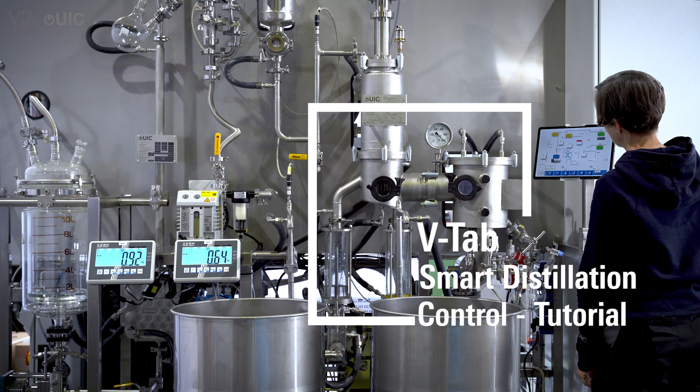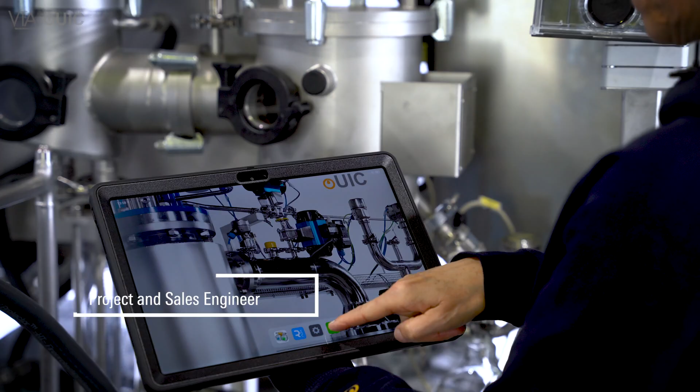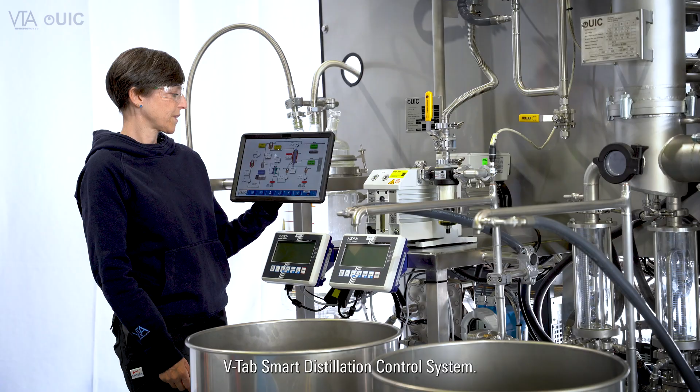Let me show you how easy it is to control our distillation system. All parameters which need to be controlled, set or defined can be managed with our V-Tab Smart Distillation Control System. First of all, we have a picture of the whole setting where you can see the main components like the feed vessel, the degassing stage, our distiller, and on the second page you see the vacuum system.

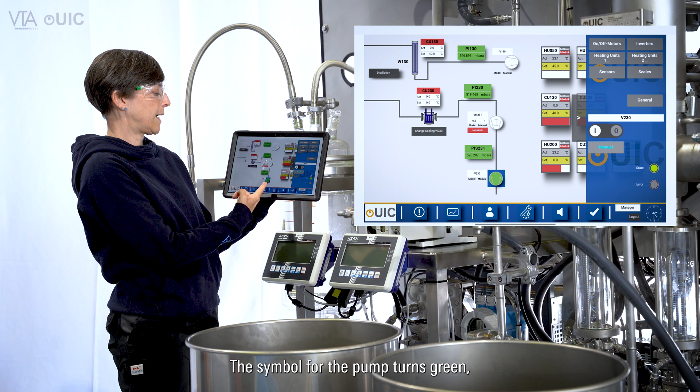We turn on, as a first thing, the vacuum system to generate the vacuum in the system. The first pump we switch on is the rotary vane pump. I just tap on the pump, the settings for the pump are displayed here on the right side, and I just say on. That's it. The symbol for the pump turns green so that I have an indication that the pump is running.

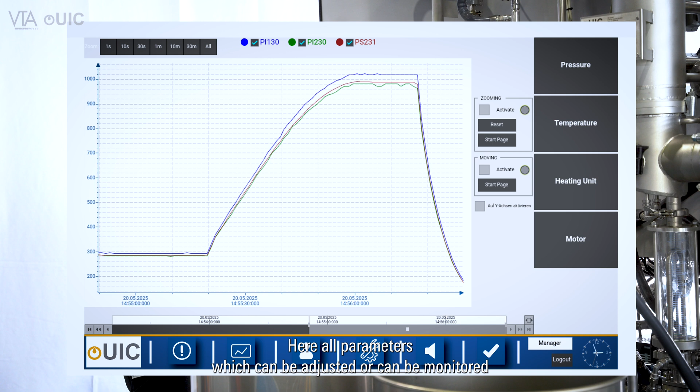Then I can switch to another section, our easy to read diagram. Here all parameters which can be adjusted or monitored, like pressure, temperature, the temperature of the heating units and the motor speed are displayed, and you can see here that the pressure is going down.

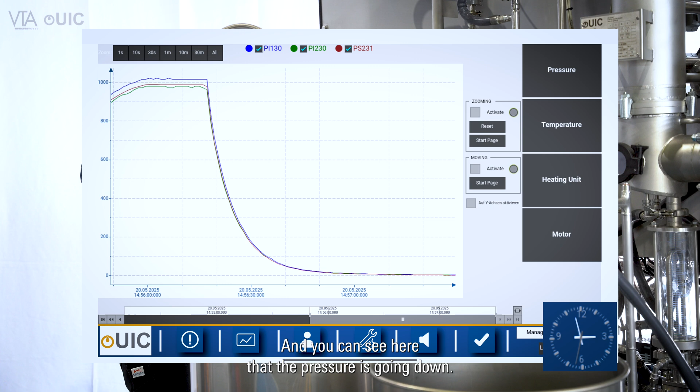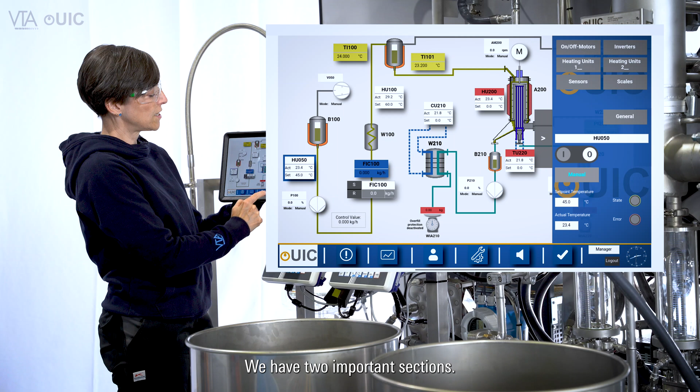Now I turn on the heating system for the feed vessel. So I simply click on the corresponding symbol. The setting window is shown on the right side. We have two important sections. One section is the set point section and the other one is the actual section. So I can type in the required temperature I would like to have for the feed vessel and turn the system on.

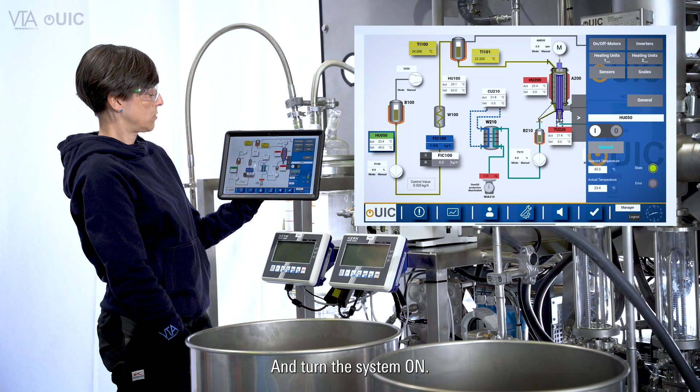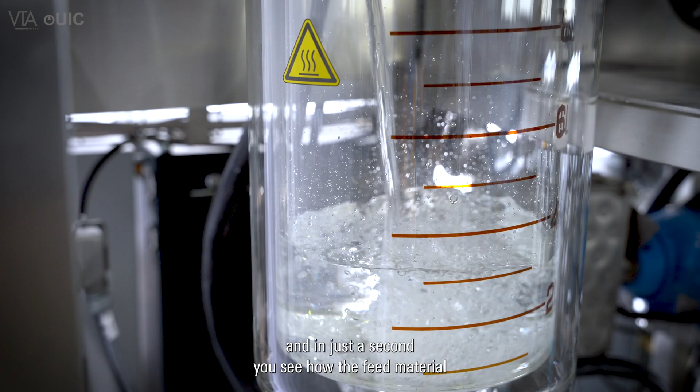Now I turn on the vacuum pump to evacuate the feed container, and in just a second you see how the feed material from the bucket is fed into the feed container. Of course, I can adjust the speed of the pump, which is according to the amount of feed which is fed into the system.

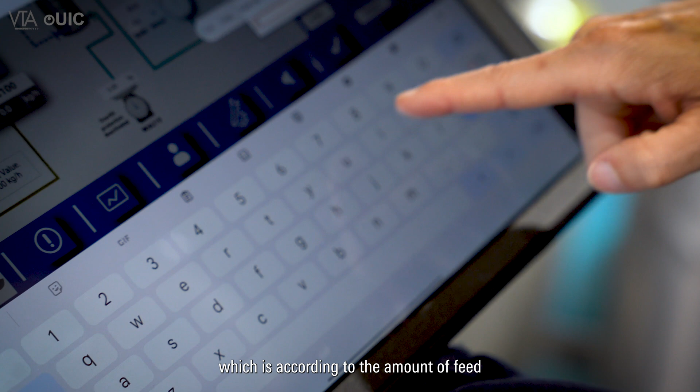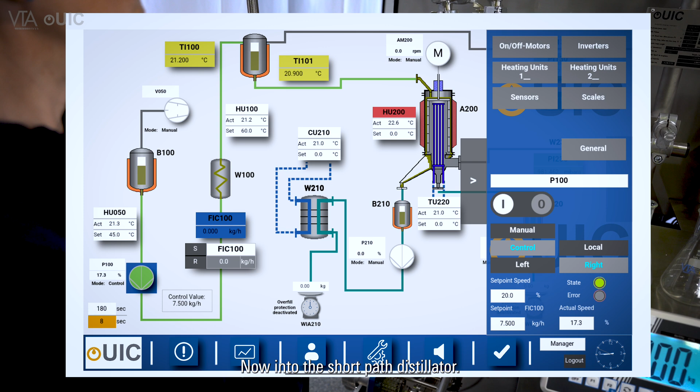We start the process by turning on the feed pump, just clicking on it and say OK. Now the feed pump is running, which is visible on the green symbol, and the feed is entering the short path distillator. To start the wiper basket of the distillator, I click on the motor symbol and turn on the motor of the wiper basket. And if needed, I can increase the speed of the wiper basket.

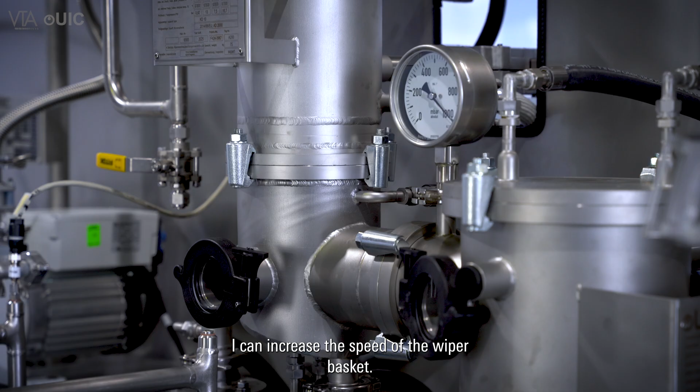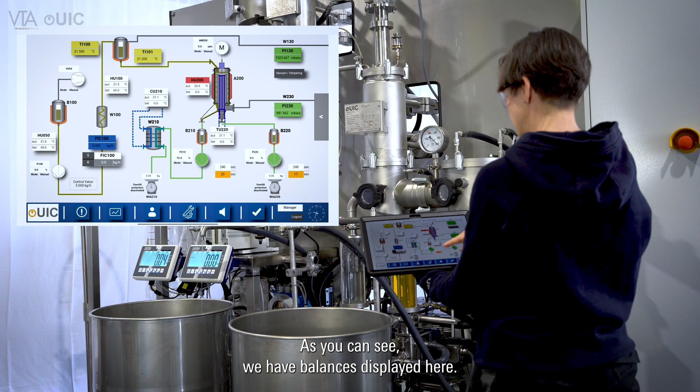Discharge of concentrate and distillate is very easy. I just go to the discharge pumps and turn them on. I also have the possibility to get a mass balance. As you can see, we have balances displayed here, and I can define that a mass balance should be calculated.

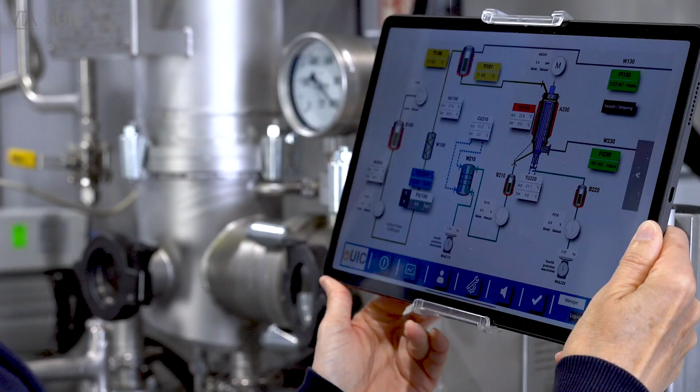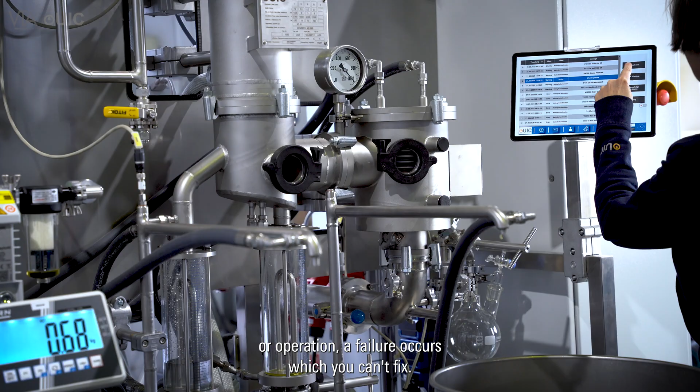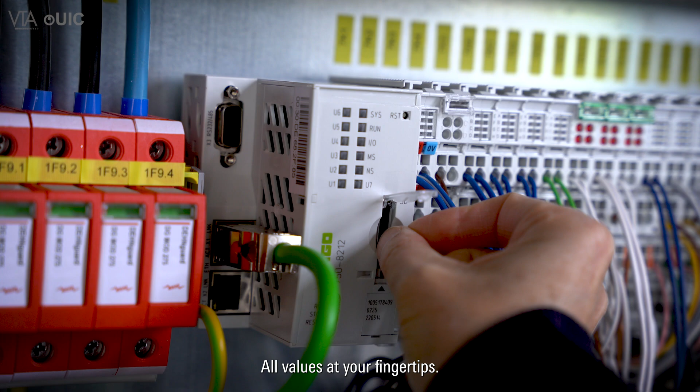Let's see what happens if something goes wrong. In case of failure, detailed alarms appear instantly. If during commissioning or operation a failure occurs which you can't fix, remote support connects directly to your system. All values at your fingertips. Export and analyze process data anytime.